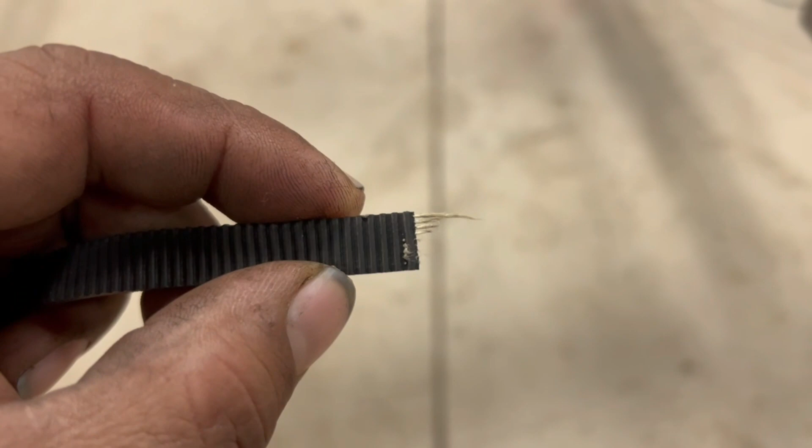Well, I had a little problem here. My belt ripped apart. I think I might have had it a little bit too tight, and it was riding up on the ledge of the pulley. It started to pull apart, and the bad thing is I don't have a long enough one to replace it unless I crimp a couple belts together to get by.

I might do it just for testing reasons, to see how everything's going to work. It'd be nice to get this thing up and running, so let's go ahead and see if we can get a belt pieced in here and get this thing working. All right, let's see what we can do.

Let's take this off and see if we can get things working better here. I almost think this might have been part of the problem, having this set screw, because it almost seemed like it pinched one side harder than the other, causing a little twist on the belt. That might have been some of the issue.

So I'm not sure if I'm going to use those bolts next time. Let's get this opened up here if we can. Might not be able to, it's pinched pretty good. We'll just go ahead and make a new one.

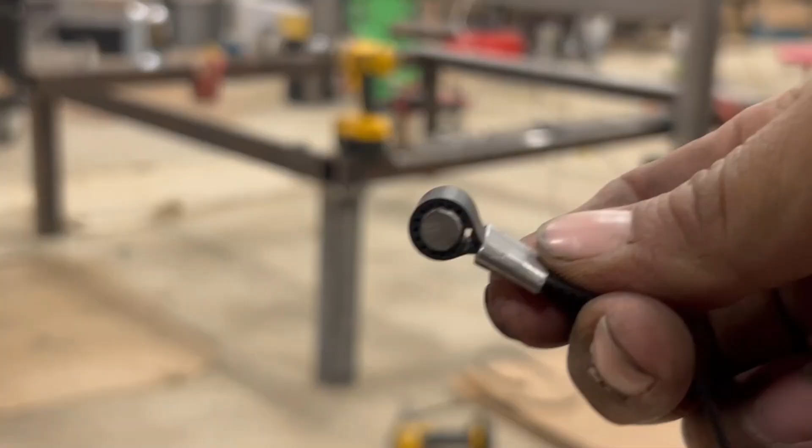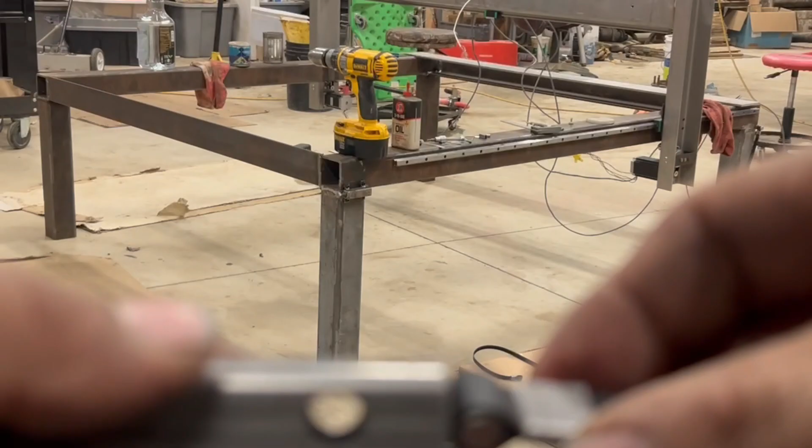What I have going on here is I got this belt pinched around itself, around a little 5/16 dowel. That's going to go into here, and that doesn't work either. But what I have is my belt already squished in here with a little 5/16 dowel in there. This will slide in here, and I'll get this little dowel to shove all the way through so it's installed here.

Let's see if we can do it right here. Let's get it into position, just like that. See? Held it in place, so I got it where it needs to be. Now we'll put this back together and see what I need to do on this other end.

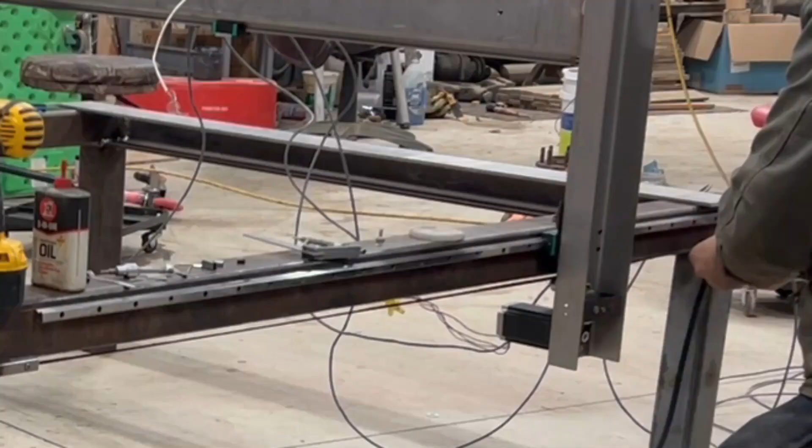Okay, I'm really close. I think all I need to do is piece this belt together here. We're going to turn this belt the other way so I can look for the bolt I just took out. Oh, there it is. That'll allow these belts' teeth to mesh up and actually lock together, so I can get this piece moving here.

Okay, got my little piece to slide on up here. There we go, I got the two pieces together, and now we'll just tap it down a little tighter here. Now we're together, we can put it back on and tension this belt down.

Oh, I didn't have this tight enough. Well, that's interesting, I'm pretty sure I did. Now I don't even know if I can get it back together. I'll tell you what, I got another one here.

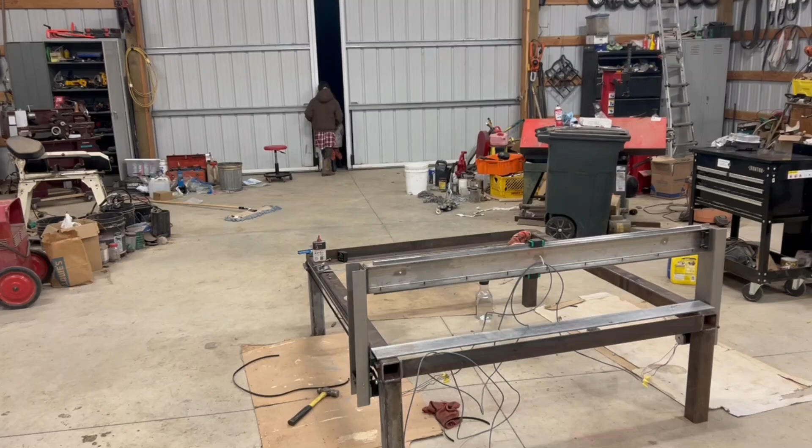Well, today we are going to make our X-axis and get it ready for the Z-axis. I'm going to take a piece of this aluminum angle, and it'll be used to attach some things together here. I'm not even sure if I'll use all 4 holes. I don't think it's going to be as big of a deal on this. If I need to, I'll have to notch this out for the top one, and I might go ahead and do that.

On the bottom, I'm just going to catch 2 holes. That bottom one is just more for stability than anything down here, so I'll just catch the 2 holes. On top, depending, I might go ahead and notch this out, and there will be another plate, and this will be attached to that plate. It's just going to hold the face and then everything together.

But the piece that comes on the back here is also going to hold my motor, and then it's going to come up, and I'll have a place where it holds my motor for my Z-axis. So I'll get those going.

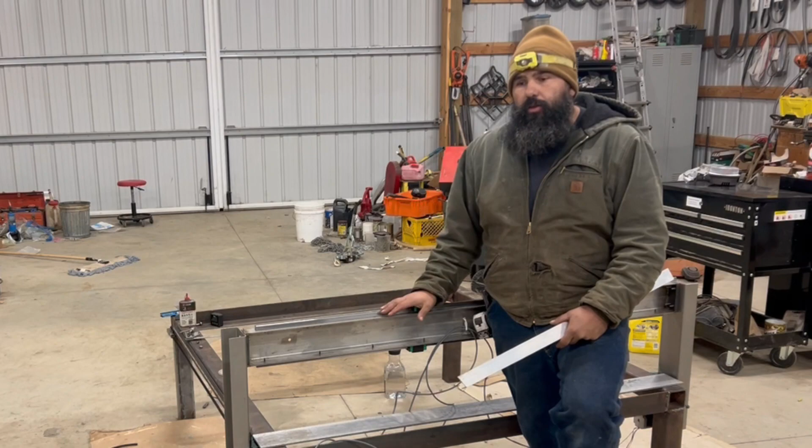But this is the first one I'm building, learning a lot. Maybe once I get some use out of it, I'll turn around and sell it, use that money to build something better, better framework and everything on it. We'll see how that goes. But for now, I need something, and this will do the job, just maybe not ideally. So we'll get what we have, get everything working, and then move from there.

Some things I would do different: I wouldn't use these risers here. If you notice, a lot of people will have some bridge work, and especially for this size, that's not a big deal to load stuff on from the front, and you can easily reach over on the side and adjust things.

All you basically need is this top part here to run on your rails or tracks or whatever you have. That's probably something I would do if I was to build another one. I would not use this, and it would lighten the load of everything a lot more. You can still get your height out of everything, and I think you'd be a lot more stable. That's neither here nor there.

Let's build this bracket here. So all I'm gonna need for these, I'm gonna have to cut two of these angle iron brackets out.

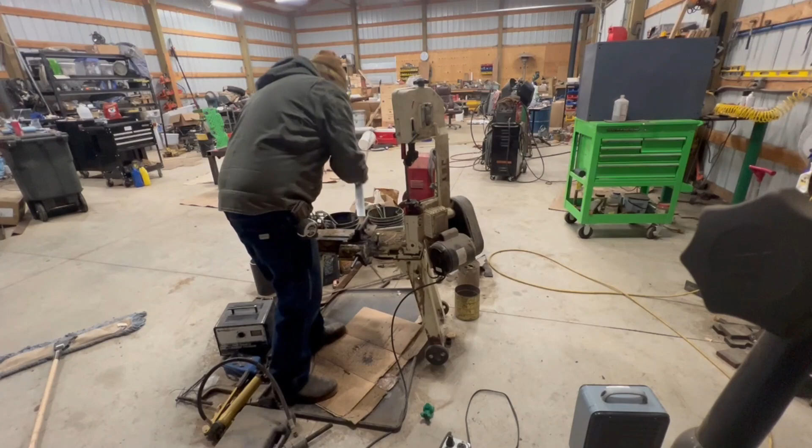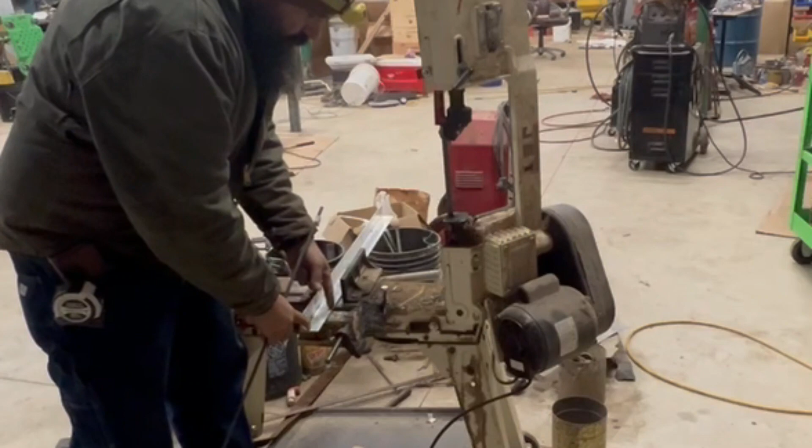One good way of cutting angle iron is to set it up like this. It makes a lot smoother cut, because when you start at one point, right away it widens out and you got more teeth hitting your metal. Rather, if you put it up on edge like this, it's got to run down. It'll run down really quick, and then it'll slow down and not get you a good cut. At least that's what I've noticed anyways. I like to cut it this way. I just think it does a lot better this way.

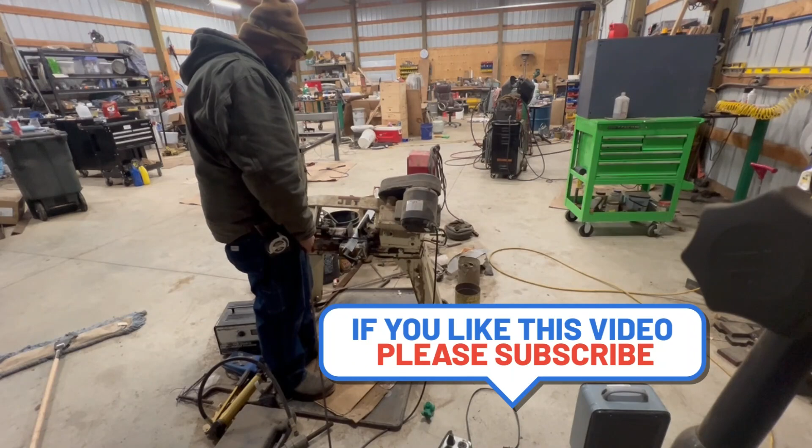As you guys can see, I got my heater because it's cold out here in the shop right now.

So we don't need this open right now. We need to go to here. Oh no, oh yeah, that's it. I was just playing around on here. Let's delete those, I don't want those here. Not needed.

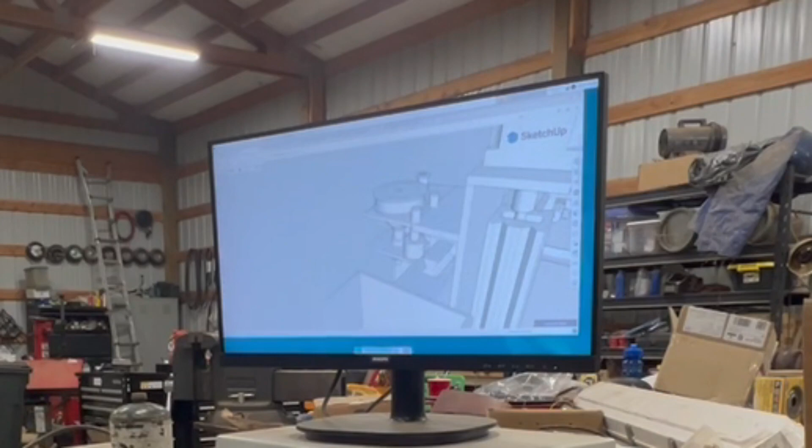I'm just looking what I need to do here. So this is kind of a rough sketch of what I need. And this is changing, it's not going to be quite that way. So I'll remeasure this, but really what I want to see is the length of this.

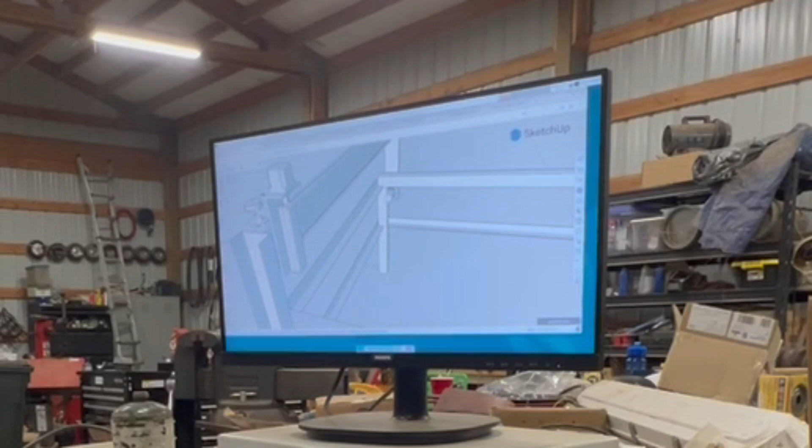Piece is 400 millimeter. Okay, so I'm getting a lot longer, I don't need the 400 millimeter, I think I only need the 200. So 200 would give me, what is that, about 8 inches roughly. So 8 inches of travel there.

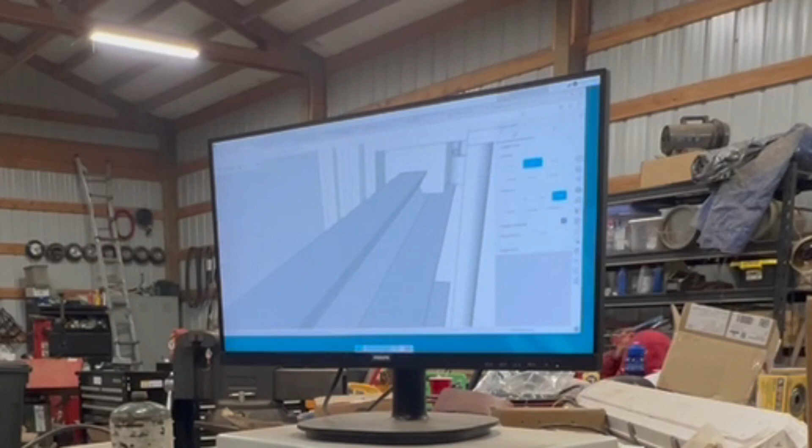So I just need to make sure I come back far enough here that I have enough room for my motor. So I gotta do some measurements here, make sure I have the clearance I need, and then make sure I have clearance for a belt here. So I gotta check everything out. So that's a rough drawing of what I need.

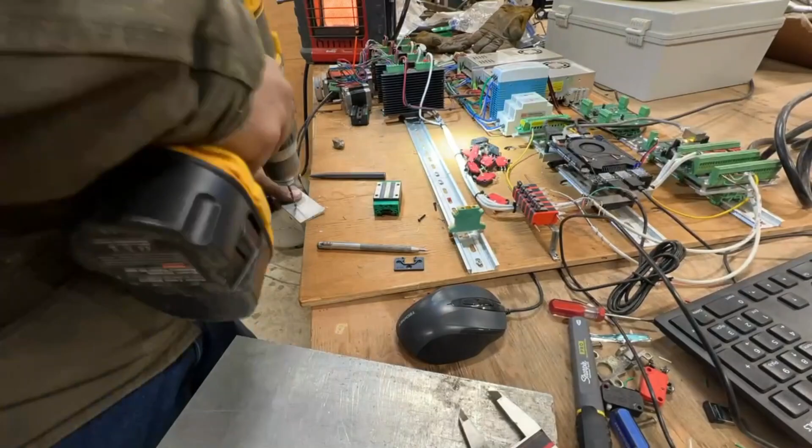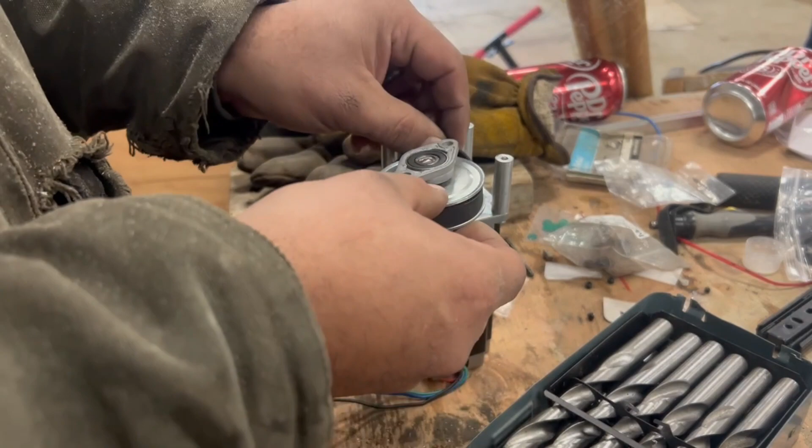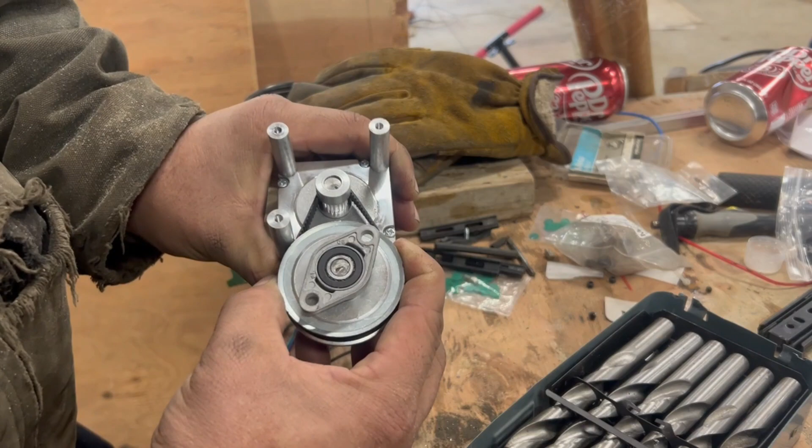Well, so I messed up. I made these and I didn't make a video of me making them. I was going to make the fourth one and put that on video, but then I realized I can't put a fourth one here because I do not have enough room for this. So when this is going to be here, I won't have enough room to run this. So I'm going to have to leave that one off, and we'll run it like that.

It won't quite be straight, it'll be off at an angle a little ways, and that will allow me to still mount it and have this out of the way. But I did break an ear on one of the other ones, so I think I'm going to use this one down there, and then this one I'm going to use down there, and then the other one I'm going to bring up, the one that has a broken tab, since I only need 3 of them anyways. And I'll bolt that together there, and that should do it for me. So I just wanted to show you guys that.

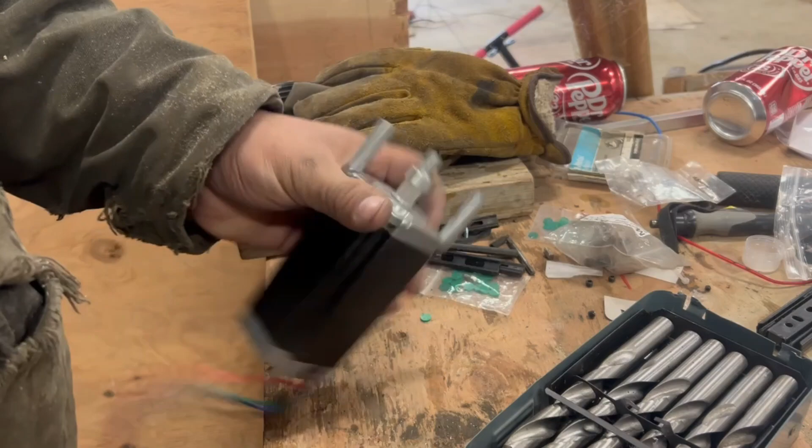And I have this plate I need to mount here. This will be mounted to it also. Shaft will come to the top, and then we'll have other stuff on top. So that's what we're going to be using. Just got to start building it, getting ready to go.

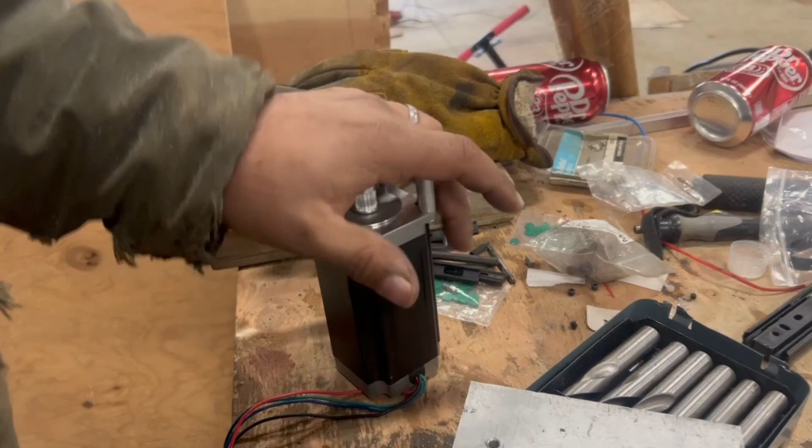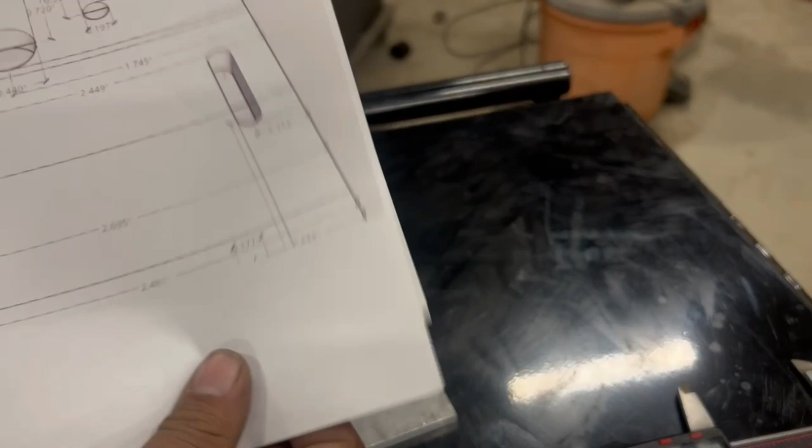Okay, so I have my plate. Here is my plate that I need to be drilling some holes in. So here's my sketches here. So this is where my bearing is going to mount.

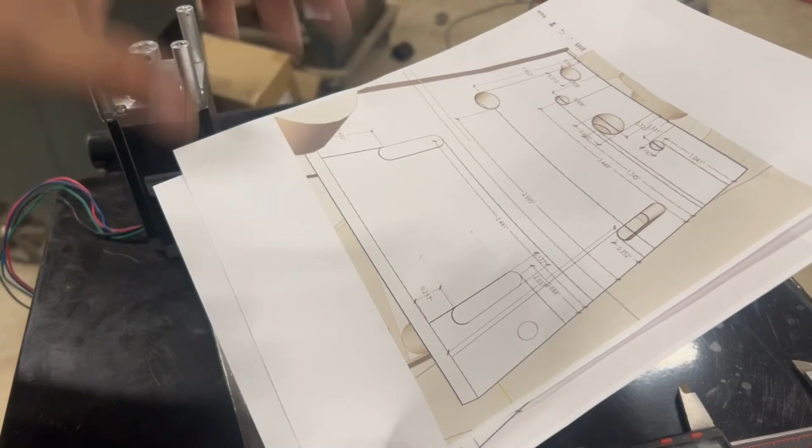These are my 2 idler bearings. That slot is far over here. These slots here, those are going to be for my motor, where that's going to attach and slide them out. You can see where they're not lined up right, so it's kind of twisted a little bit to allow for that extra room for my belt and pulley. So that's what it's going to look like.

So we're going to do some drawing here. I need my scribe. Okay, I found my scribe. So we're going to mark this first measurement here.

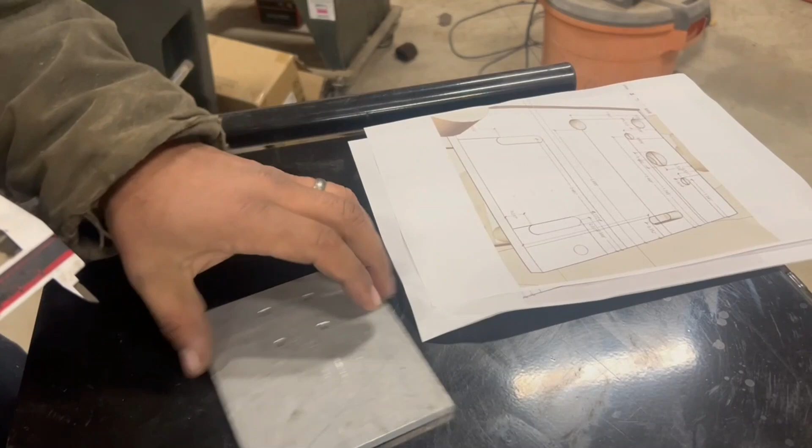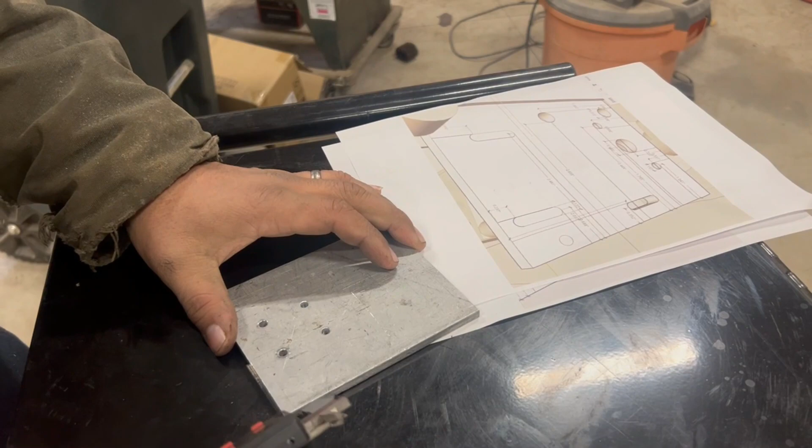And that one is 0.237. That's really close right there. So you can go ahead and do this to get some of those lines in there.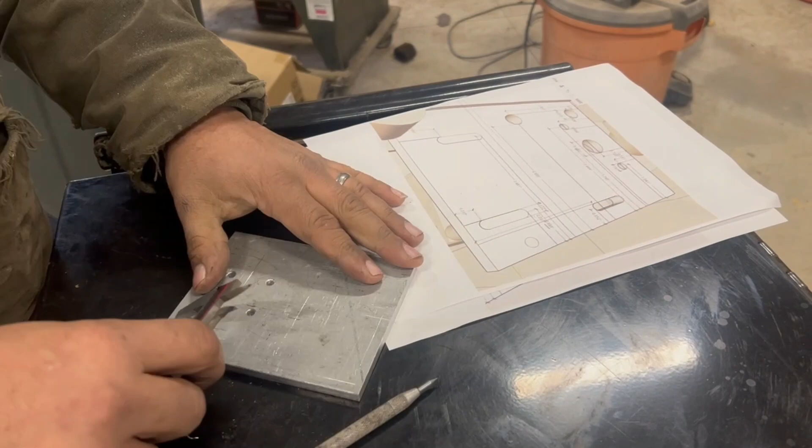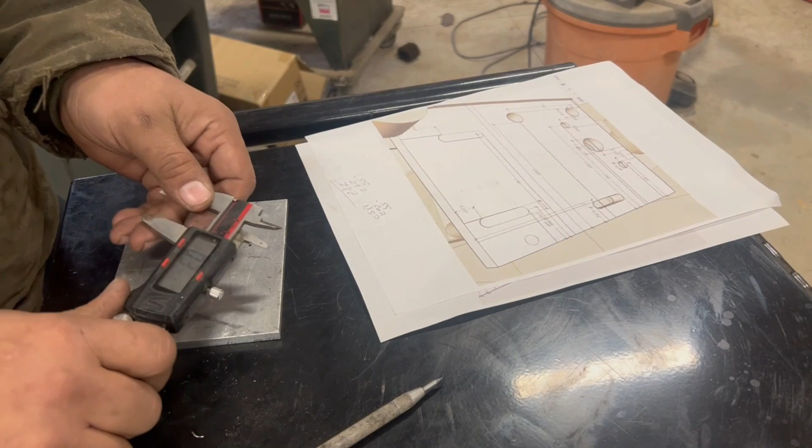So I need 1.152, 0.688. And then we need 2.481. We need 1.152, 352, 2.037. Now we'll go ahead and center punch everything.

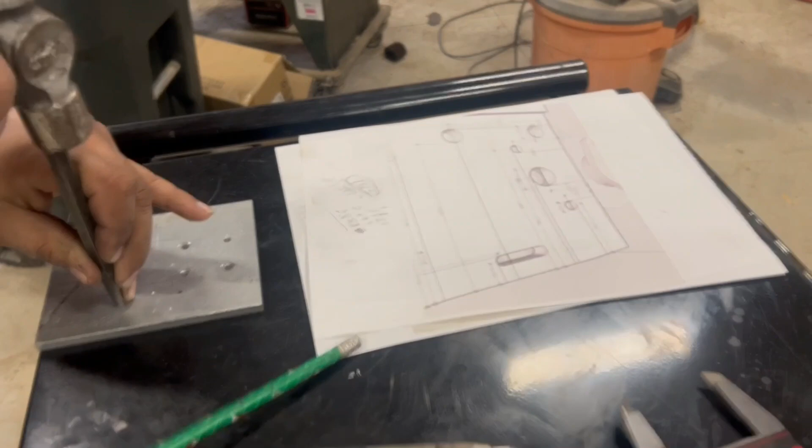So sometimes you can feel your point go into the groove, and then you just roll it right up on that tip. You make sure your tip is going to touch inside there. And even if you don't get it right, you can usually kind of work it to where you need it to be and then give it a good smack down. Usually will work.

One, two, three, four, five, six, seven, eight, nine, ten, eleven. There we go. Got all our holes in.

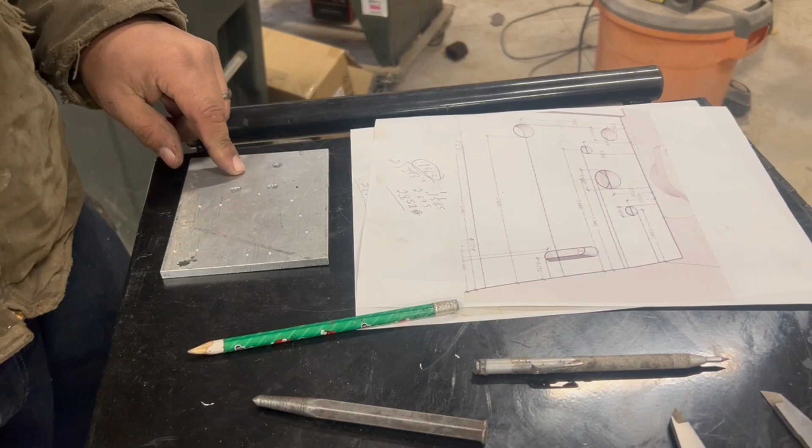I might trim some of this off. We'll see how things are going to line up. I might need to. These holes, I'm not going to probably use any of these. I'll probably trim a little of this down, so I'm not sticking too far off the back once I get it mounted. But we'll get these holes drilled.

Drilling all these holes will be relatively easy. These, I need to drill and slot those.

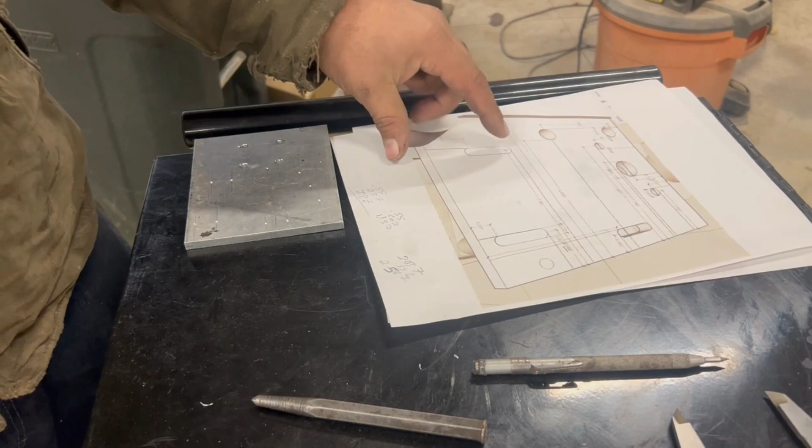Okay, so now I'm ready to get this all drilled up.

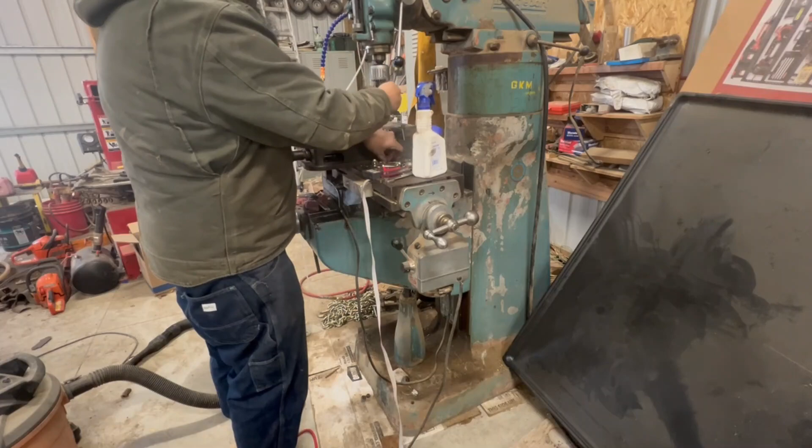So I will put cap screws on these, because with cap screws you can get them a lot tighter than you can with the Phillips head. That way you don't lose any adjustment. So yeah, everything looks pretty good here. So we know those are good.

Now we can go ahead and drill our other holes out, and then drill out how we're going to mount this. And then I got to make another piece that'll kind of help hold everything together so I don't break anything.

So I'm just going to put you guys in warp speed. You guys don't need to watch me drill every hole. So we can get this done real quick here.

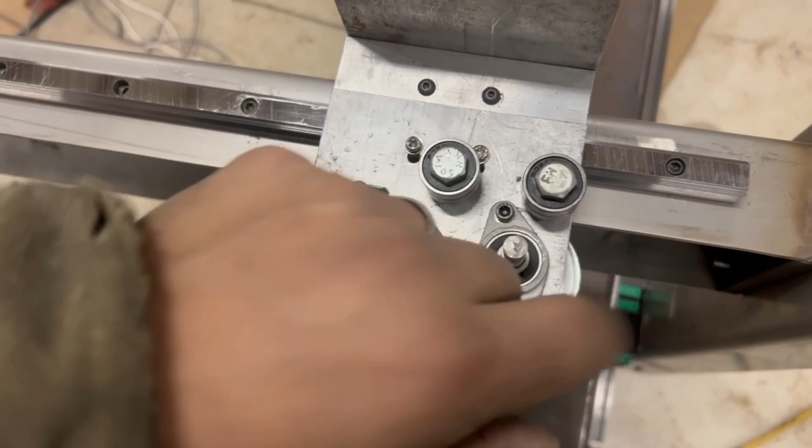X-axis is now on. Now I need to make my belt holder and tensioner. One thing you can see here, I'm not perfectly straight, so it's going to be pulling at an angle just because of room here. So I probably could have moved this over a little more because you can see where I have the belts. I can still go back about a quarter inch, and I could have probably even milled them out a little further.

But I wasn't sure how everything was going to be, so that is where it is. I think it'll do all right. The belt will come across kind of funny, but I think it'll work just fine.

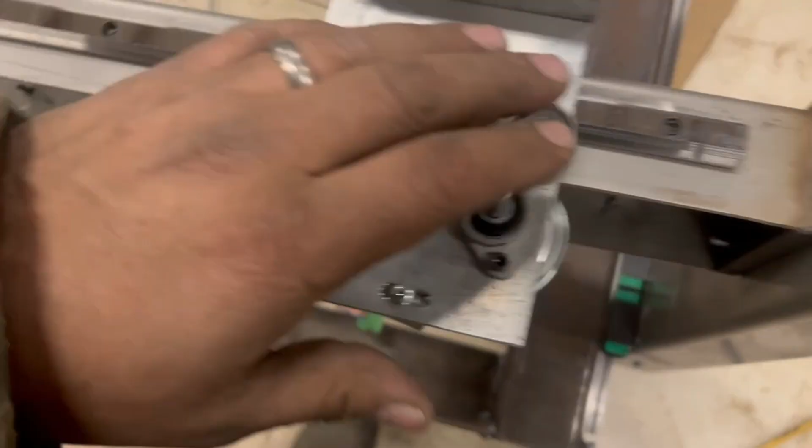Gotta get those made, and then I need to install these rollers. I don't have my extrusion yet, but this will be for my Z-axis, and the extrusion will go up and down here, and the motor will be mounted to the top, and it should work pretty good that way.

I'm going to pull this off and get it set up so I can drill and tap it so I can install my rollers. That's what I'm going to be doing now.

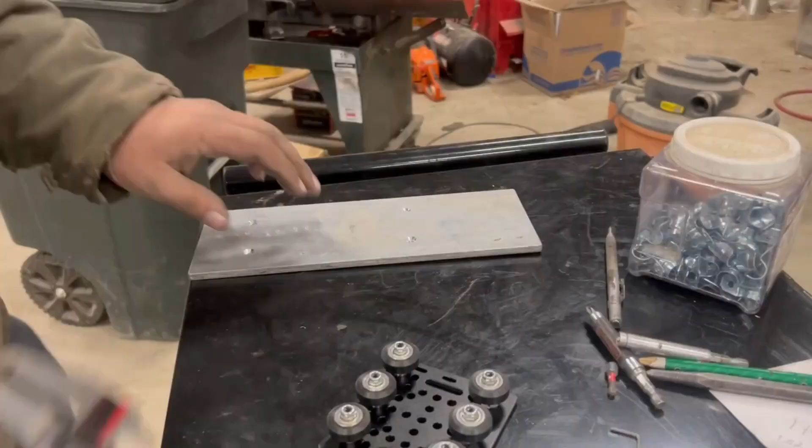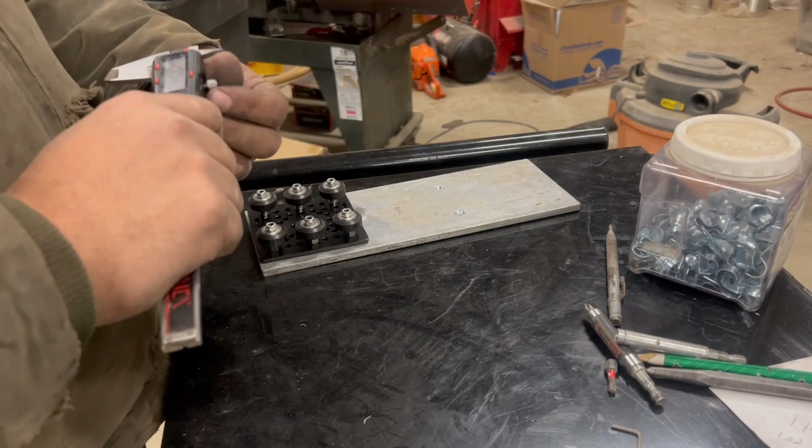Okay, so for setting this up, this is going to be the bottom side and this is the top side. So this is going to go down here. So we need to measure a few things. We need to measure how wide this is, so we can locate it in the correct place.

And then what we'll do is run this here, pick up that edge, and then do a square mark down here.

I'm not sure if I need any more than that. I think three will hold that plenty. So let's go ahead and drill it, and then we'll tap it, and we might taper these holes to put. Probably don't need to actually, but I might go ahead and just taper them so we countersink them, so things settle flush.

You could technically drill these holes out on here and install everything on here. I would need longer bolts, or sink them in on the other side, which I could do. But I don't think I want to do that. I think it's easier just to stick it on the front, call it good, make it easy.

Let's go ahead and drill these in warp speed.

On your wire strippers, a lot of them have a place for a bolt to go through. This one has 632 and 832. So you can stick your bolt in there, the depth you need it, and try to cut these things. These are stainless, so I think they're a little harder to cut.

There we go. And you got to pull them out. And then it'll kind of clean your threads up. Then you go ahead and get everything screwed in here.

So let's go ahead and do a test fit here.

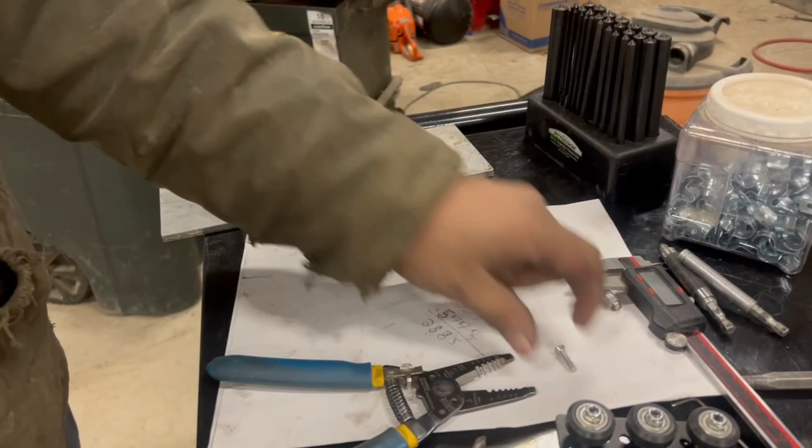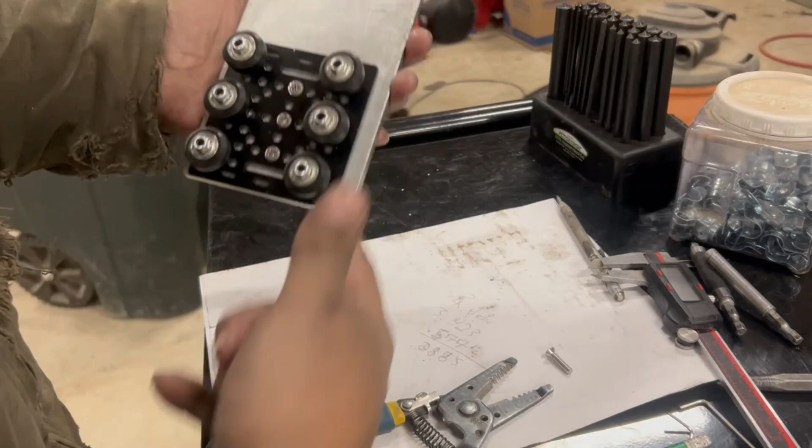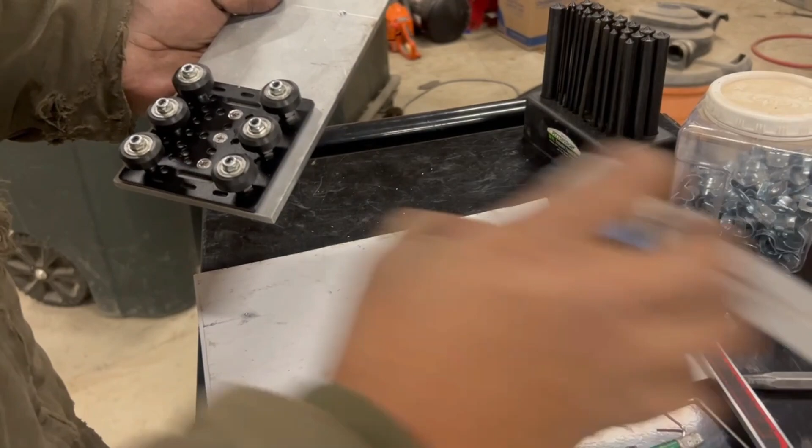Okay, so I did notice I was off a little bit. I noticed when I flipped it over, I wasn't centered anymore. So it's not a huge deal being off a little bit. It's just not where I would have wanted it. So I don't know how it got moved over to have that set right there.

Oh, I guess it works good for that side, but not the other side. So I was off a little bit. Must have bumped this in or something. But there it is. Not bad. Not perfect, but not bad.